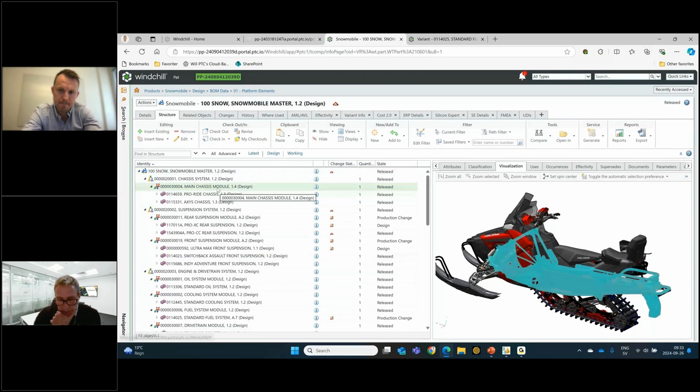You can also see the link between the structure and the model here. If I select something, it's highlighted in the visual tab and vice versa. So if I select something here, it should be highlighted in the structure. For me, this is great information, a great capability that is really strong.

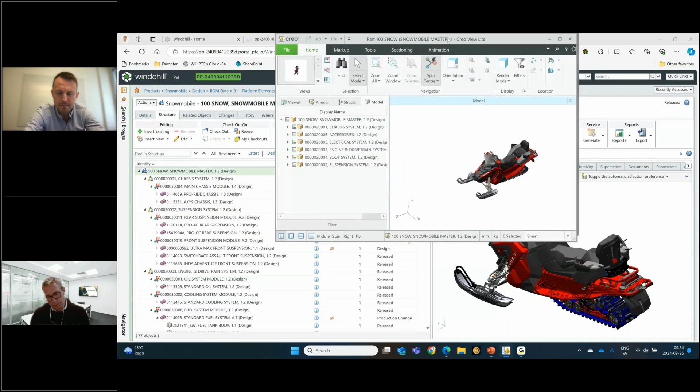There's also something included in Windchill called Creo View, which is a lightweight tool for visualizing, but you can do a lot more. So from Windchill, I can open this structure in Creo View. I just show this because you can do a little bit more here.

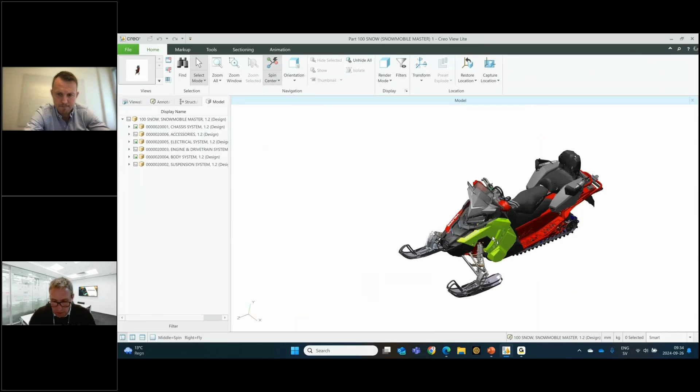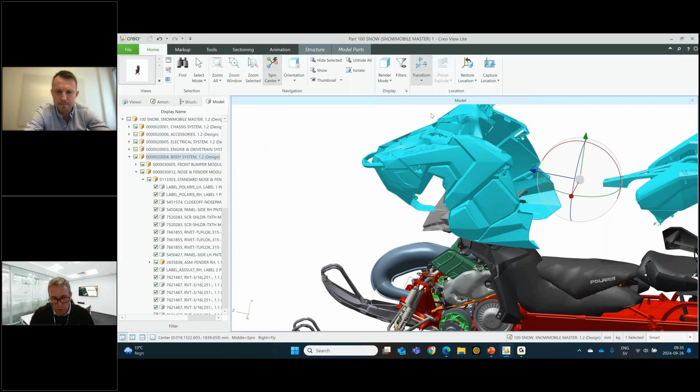You can, for example, hide components, or move around in order to just investigate and find information that is relevant for you. There are tools for making sections. You can actually drag this - if I get the arrow, I can drag the section here.

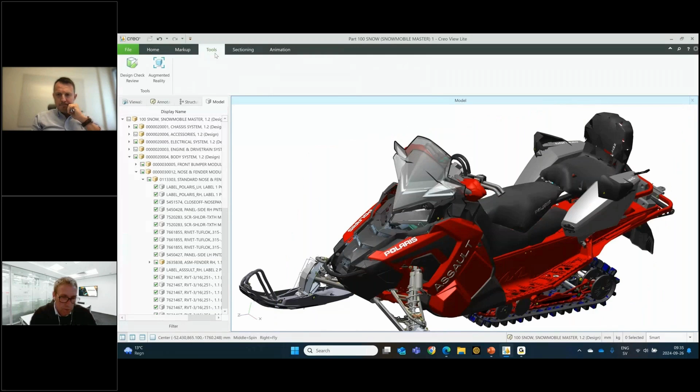And there are tools, for example, for measuring. So if I would like to measure something, let's say the distance between that surface and that one, we can measure. And it's the exact same surfaces as in CAD, so it's exactly this dimension.

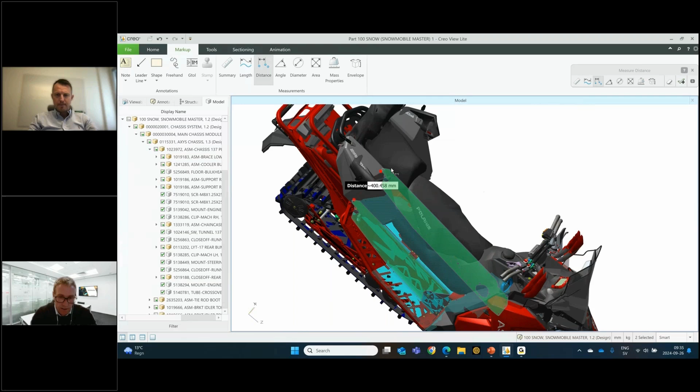There are also tools for adding annotations like text and markups, and this can actually be saved back into Windchill as an annotation, and can be used, for example, for the change purpose.

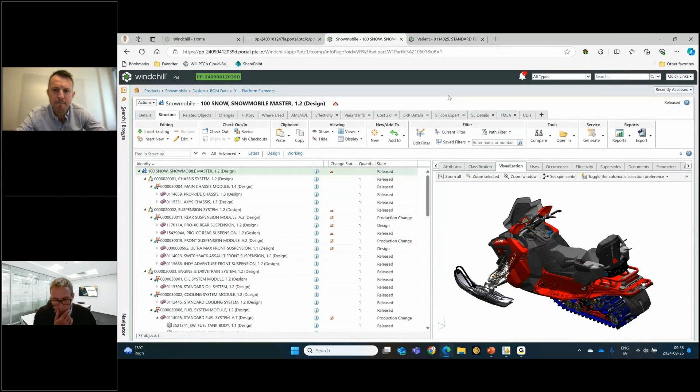Good, I think we need to move on. I will actually switch to another part here, the tank, which was part of the snowmobile, and I will go to this change tab.

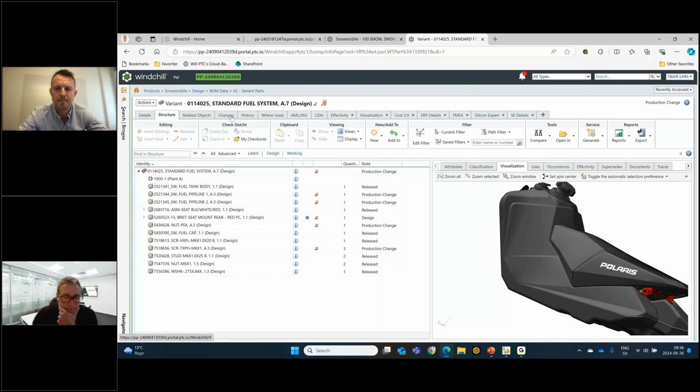As a user, I can see by this icon that this part has an ongoing change. The state also indicates that, but this icon specifically shows there's an ongoing change. So if I click the change tab, you can see all the related change objects.

As I mentioned, there are objects to support the complete change process: from identifying problems, that's a problem report, then we have the change request, which is the object and workflow for investigating and justifying the change, and then we have something called a change notice.

The change notice is actually the implementation of each change. So I click the link to the change notice object. You see it's similar, with tabs containing information, and a short description of the change.

Since we will actually do some work here, there are activities planned in order to make this change. In this case, the design needs to be updated, and after that someone needs to review the manufacturing plan. So there are two activities that must be done to implement this change.